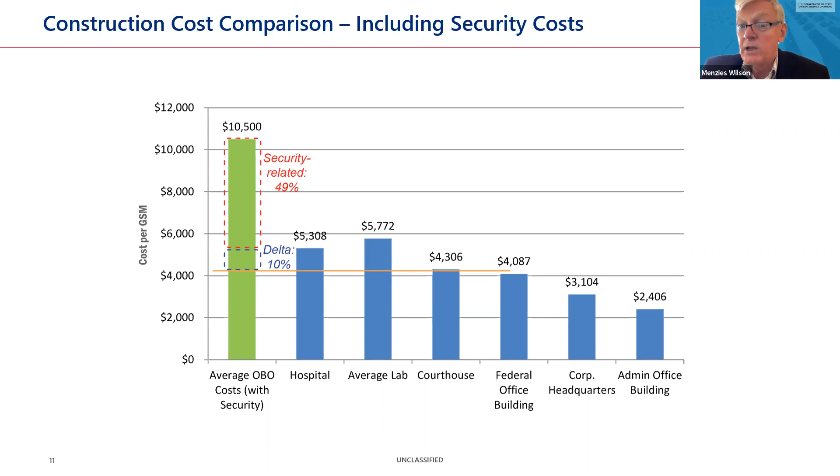If we go to the next slide, please - what it does for us is it makes it a little bit difficult for us when we compile our estimates to use commercial databases, because the construction cost data there is not that relevant to the work that we do. This has been a challenge for us over the last several years, and we are required to do fairly detailed estimates at early stages in the project.

As I mentioned before, we do parametric estimates from basic planning, programmatic information, all this kind of stuff. So how do we underpin those estimates, and what kind of cost data do we use? So what we've done, and this is a work in progress, but it's working quite well for us, is we established a couple of years ago our own in-house cost data group.

We hired a couple of data analysts and put a couple of cost managers on that to analyze all the data that we have in-house, synthesize that, and try to break that down into some common work breakdown structure that we can then feed back into the estimates that underpin our cost models and that exist within our cost estimating software. We currently use Sage Timberline with a couple of reporting functions added to that. It's working very well for us.

And from that, we've been able to develop 12 basic building types. These are sort of common buildings that we typically have on our embassy compounds or campuses overseas, whether it's the access pavilions, marine security guard quarters, warehouses, that type of thing. And we've developed models that we can then input basic programmatic information into that will give us a detailed cost estimating output.

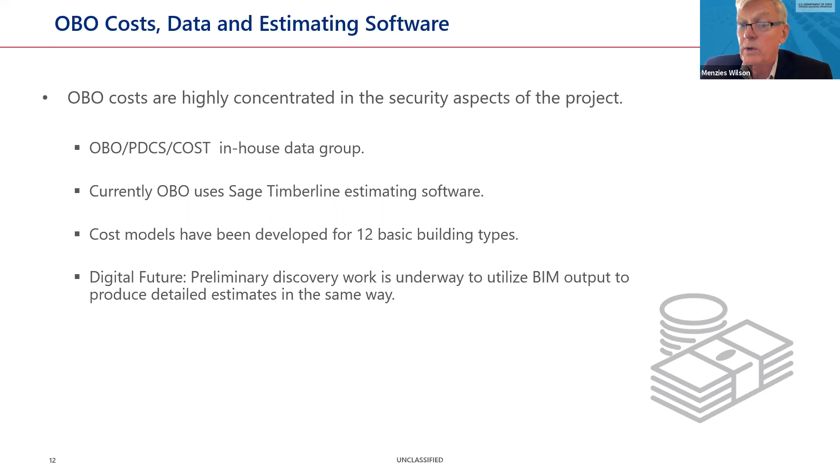We would then escalate that to the projected time when construction is estimated to start based on the program we have. We have some futuristic things where we're looking at a digital future, and right now we're using programmatic information from the Space Requirements Program. We believe we can get similar programmatic information directly from BIM, and we'll talk about that later in the program. There are some exciting opportunities up the road in terms of what we can do for cost estimating from BIM outputs.

Back to the data strategy we had, one of the problems we've had is data. We don't have good data. Individual cost managers will invent their own workarounds, and so there's a lack of consistency and uniformity across the estimates. This is something we want to try to eliminate.

We're working with our cost estimating consultant and our data group to try to integrate and absorb the data we've got and put it into a useful format. We get, for every single project, milestone estimates from the AEs that go down to Uniformat Level 4. These things line all over the office in 3-ring binders and PDF format, and we lose that data, so we want to try to capture it. We're putting in place a strategy and process to get to that so we can improve the quality of our estimates and be less dependent on expensive commercial databases, which really don't have a whole lot of utility for us.

Just a couple of other points I should have made before: all our projects use US architects, US specs, and US general contractors. All our contracts are denominated in US dollars, so that may give you some idea of the tremendous US component to our projects.

Back to Angel's comment about the embassy effect, we sometimes find that our facility, our embassy or consulate, becomes a kind of economic anchor in that locality and spurs economic growth, supporting restaurants, coffee shops, and all that kind of stuff. In addition, we estimate that about 20 to 33% of the total project cost is a direct investment into the host country, which is a fairly good diplomatic message for us to send. But also 60 to 70% of the value of our taxpayers' dollars actually comes back to the US, spent with consultants, architects, suppliers, contractors and others who support our projects. Just a point to bear in mind.

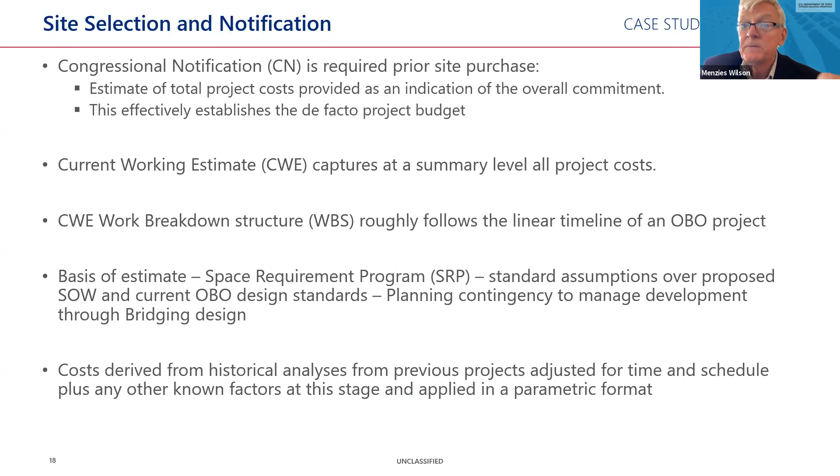This is the typical work breakdown structure of the CWE that we would send in support of a congressional notification that accompanies the project all the way through. It's pretty linear, and it roughly follows the logic of the delivery process. We do the site acquisition, project development, then we go into design.

Once design's complete, or bridging in this case, we award a design build contract. We may have other construction costs - telephones, utility connections - that are performed by others other than the primary contractor. We have a planning contingency, which we'd use to get us through project development. And then we have a construction contingency, which we hand off to our construction arm once it goes into project execution. We may have value added tax that we have to pay, and we also have project supervision, construction security.

We have to furnish the building. And then there's a small allowance for art in embassies that allows our cultural heritage group to go and acquire appropriate artwork to display in the finished facility. The bottom line, the total, is the total request for funds that we ask Congress to give us. Once that's approved, we go forward and move into the development of the concepts.

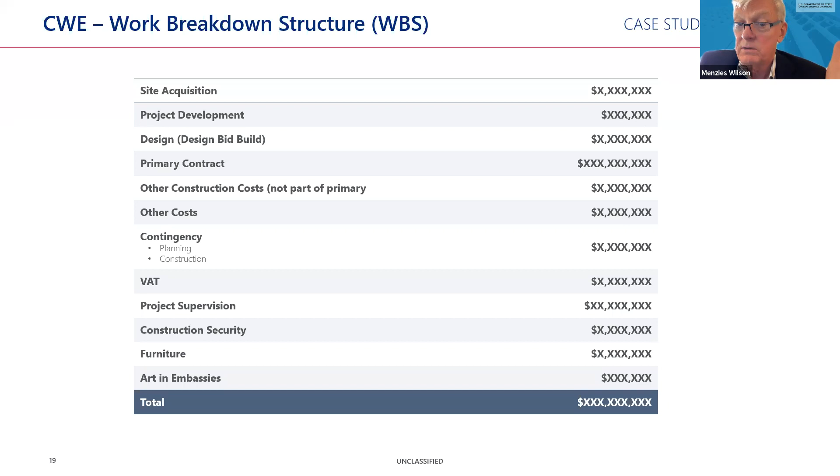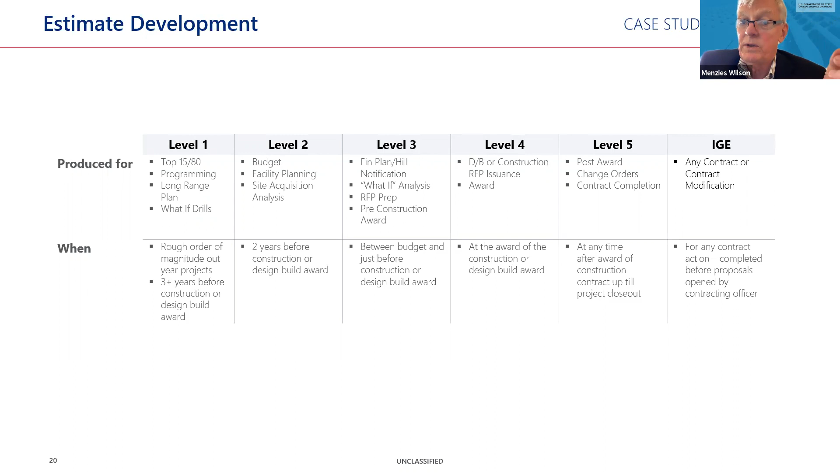Again, the CWE is categorized by different levels based on the certainty and quality of the information used to produce it. It starts off at the basic planning level from preliminary planning information, space requirements, and moves up right through to level 4, which is the complete bridging design or complete design if it were a design build or design bid build, pretty much at the time the contract's awarded.

Everything follows through, so we're tracking the costs all the way through the different CWEs, reconciling the differences. We get the check estimates in from the architectural team, and we're trying to keep the project on track all the way through, and we track and report on that to our management and beyond if necessary.

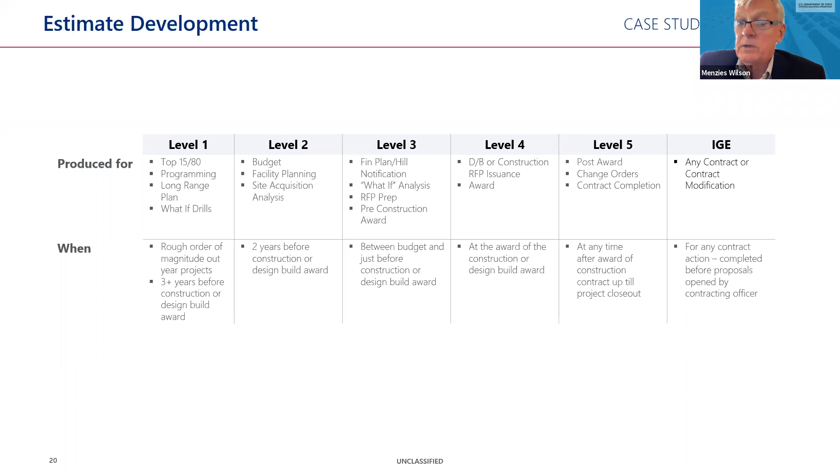So once we've got the site selected, we've notified Congress, we buy the site. The next thing, we move into technical due diligence. Our teams of design group and our OBO-led project management teams with the cost manager will go to site and perform what's called the project development survey. We're starting to look at how we're going to accommodate the program onto the site. We begin the technical due diligence - soils reports, utility connections, and all those other things.

We're also doing an early evaluation of the risks, both economic and political. They'll be looking at logistics, execution type impediments perhaps. Political risks in terms of, can we get visas in there? What's the state of the local workforce? What's the availability of materials? Is there enough space on the site to accommodate laydown and all that type of thing?

From all of these things, we start to formulate what we call the design to budget. We're going to get ready to go with the architect or the architectural team and develop 3 concepts, one of which we will pick, and we will give him a target cost that we want him to constrain the design to fit within. And so we're moving on now.

Back to you, Angel. Yep.

When we kick off designs, there's always overarching OBO goals, which we've talked about in the beginning - security, resilience, and stewardship. And then there's project-specific goals, really based upon what's happening in that particular location.

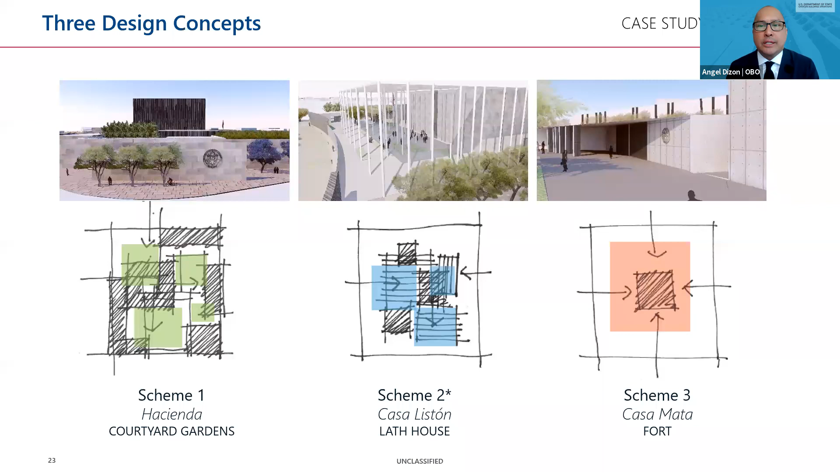And then obviously we start to settle in on one. In this particular case, we settled on scheme 2. It's described as this lath house, which is that sunscreen that provides shelter above.

This is kind of the point where the AE is starting to get into more detail - there's some more refinement on the major security mitigations, especially physical security, the major site moves. We're looking at the bigger infrastructure decisions and all the big things that impact the massing and the blocking and stacking, and that's what this second evolution is. We're also starting to look at facade a little bit more, diving deeper.

The other thing that happens in parallel to the industry advisory reviews is what's called the senior management review - all the office directors, managing directors, and the director of the bureau together in one meeting to better understand the project and provide advice and guidance on things they're seeing from their senior perspective. So at the same time there's a design review by the technical staff, and the senior leadership review just to make sure we're setting the right course for ourselves.

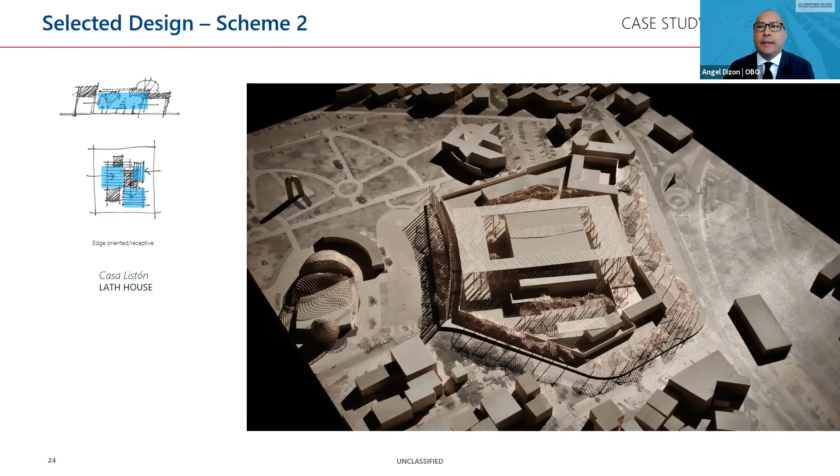Once they've selected the preferred concept, sometimes there are a few puts and takes, as Angel mentioned. The Industry Advisory Review Board may make suggestions to incorporate various pieces, perhaps from one concept into another, and come up with the final accepted design that they want to proceed with.

At that point, we may make some adjustments to the design to budget. These tend to be fairly minimal, but we're going to go forward with a design to budget issued to the architect who's developing the budgeting documents.

He's then required to submit milestone estimates as the design develops to confirm that he's still on budget. For this particular case, on Matamoros, the design to budget was set at $120.4 million. The construction contract ultimately awarded was for 116.3, the lowest of three bids that ranged from 116 to 145.

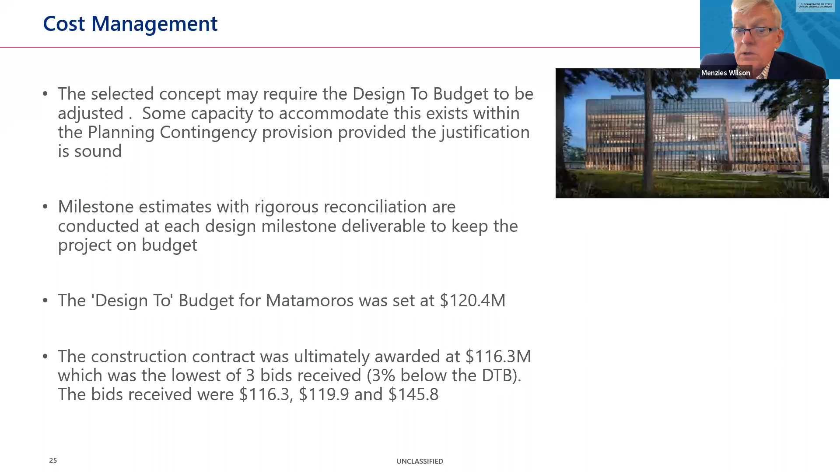So we were quite close, but at this point we haven't taken into account the contribution made by the value engineering study, and we'll get to that in the next slide. This project turned out quite well for us. If we go to the next slide, please.

OBO's got a pretty robust value engineering system. We've had that going since 1987. We've conducted something like 500 plus value engineering studies, and over that time frame we've booked $1.2 billion in cost avoidance or cost savings.

That averages out to about $35 million a year at a total cost to us of about $32 million. So the value engineering program is returning to us $37 for every dollar spent. So it's doing its job.

On the Matamoros project, we had 31 recommendations, 9 of which were accepted for a value of $2.1 million. If we apply that $2.1 million to the design to budget, that would suggest we should expect the bids to come in at 118.3, and the final award went for 116.3, with the second guy at 119. I don't know if we can take all the credit for that through value engineering, but we think it contributed something.

So we use that. It's mandated. We have a good program, and we're also trying to help other bureaus within the Department of State set up their own value engineering program. So we tend to be a leader within the department for that.

I know there are many of you out there in the audience who perhaps participated in these facilitated VE studies that we have. In 2016, we introduced a risk management program that runs similarly to the VE program.

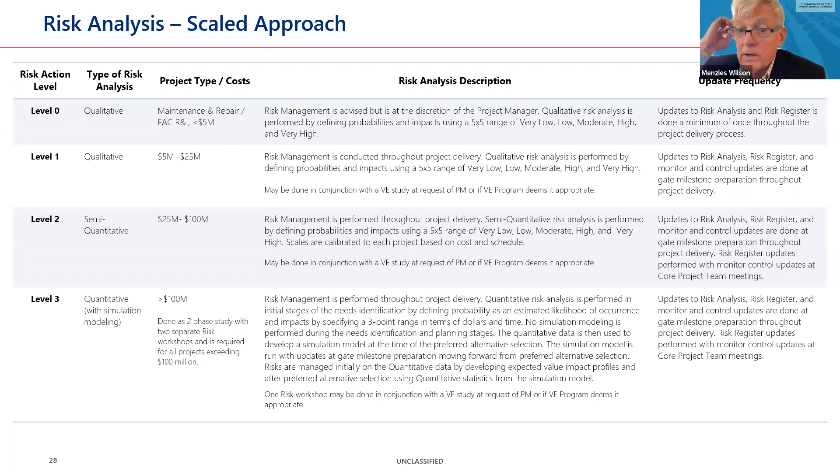So it's, I think I mentioned that, and then also the pilot program. That would require a combination of OBO core project team members facilitated and supported by AE and risk professionals who would come in on the team to help us understand and review the identified risks and look at the documents to see if there's anything else we might have missed.

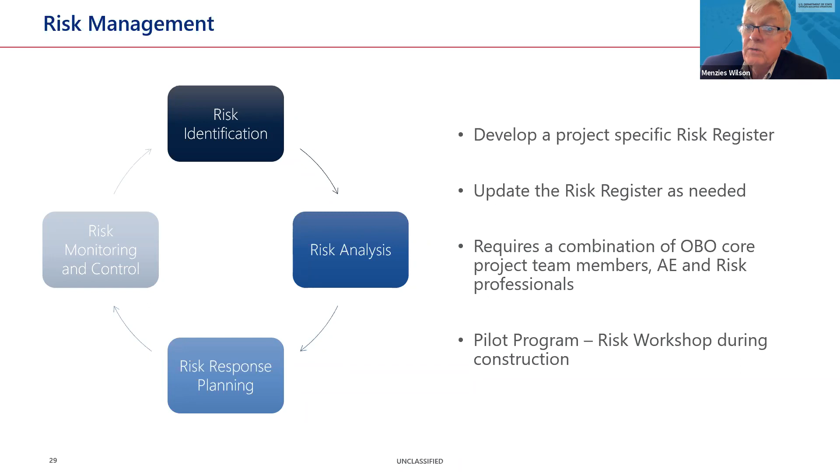Back to Angel. So obviously the process moves forward. We end up awarding, putting out the RFP and awarding the construction contract. And this is really kind of the result.

Some of the features here, one of the things I love about Matamoros is it's actually a relatively simple building. It's really just a box with this shade structure on it. But it's simple, not simplistic, right? It provides this performative type of quality in terms of keeping the sun off the building and reducing our energy demand by a pretty significant amount.

And it starts to add increased functionality for that exterior space that typically would go unused. Now, because it has shelter, it has become much more functional, especially when you're talking about consular visitors coming to visit, diplomats coming to visit. You're able to actually host events outside because of the structure. And this one gesture, this simple gesture of the awning, really becomes the performative, functional, and civic gesture for the consulate.

It's a wonderful little building, pretty modest price point considering having to build this in a different kind of country. But you can see here, it's a really kind of wonderful building.

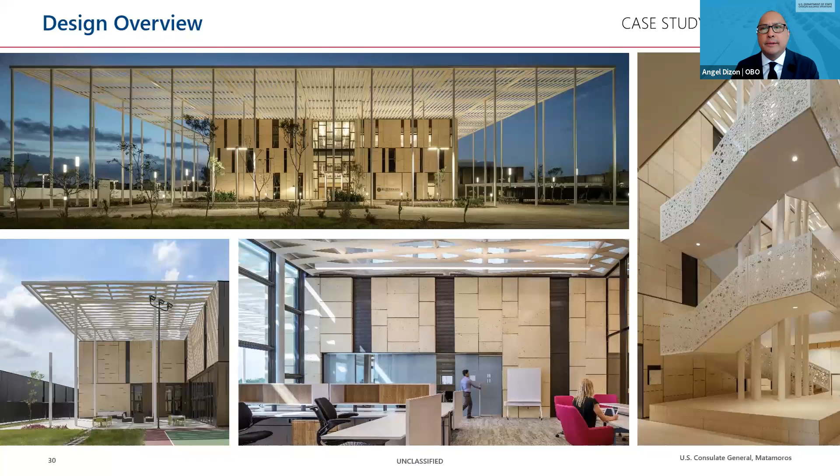Next slide. Part of what makes these things work is the way we really push the AEs to use materials and design elements consistently throughout the project so that we're getting a lot more bang for our buck. If we're going to pay for it, let's pay for it and get a little bit of mileage out of it. In this case, you'll see how the material and vocabulary around that canopy moves into the interior space and starts to define the ceilings for some of the office spaces and gallery spaces.

Same thing with the exterior limestone. This coral limestone is used on the outside, but also weaves its way into the inside of the building to give you this inside-outside kind of thing. But it also provides double duty for us in that, from a maintenance perspective, this building is pretty crazy robust, and the maintenance demands of these buildings are really low. When we're looking at 80% of the cost being after ribbon cutting, we need to ensure that these buildings are very, very durable.

And the more materials you drop onto a project, the more you're going to have to store somewhere to make sure that you're able to replace it. And so this architect was able to leverage the right kinds of materials, use them in multiple locations, and get a lot of mileage out of it.

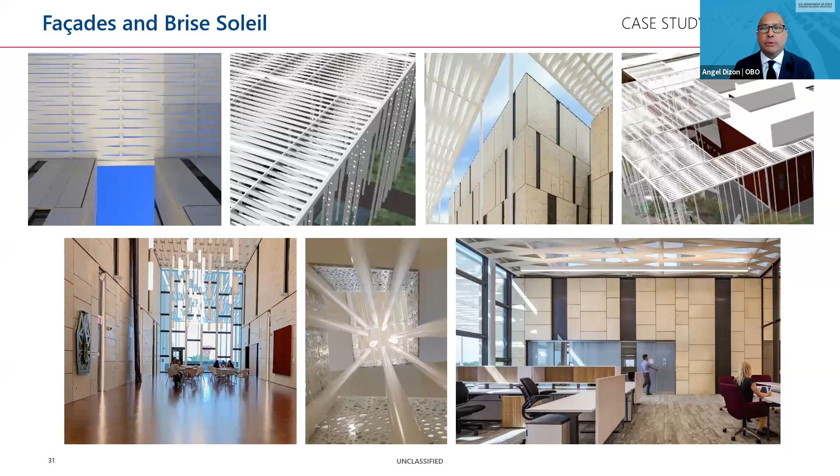The other thing this project does well is really start creating multifunctional spaces. Frankly, we don't know what this building is going to need in the next 10, 15, 20, 50 years. So it needs to be able to adapt within this fixed envelope and expand and contract within the perimeter of the building. So what the architect has done, and what we really request for all of our architects, is that we provide spaces that are multifunctional.

In this particular case, in the gallery, day to day this probably functions more like a social gathering space, a place to eat. The servery is just off to the right there in the back, but it's really kind of a social hub for the building. But it doubles for event space. It can be a place where we can host a town hall because of the scale. We need those kinds of spaces because we don't know exactly the future of these posts. So they need to be future-proofed in a way. And that's really done by providing multifunctional, multi-use kinds of spaces and materials.

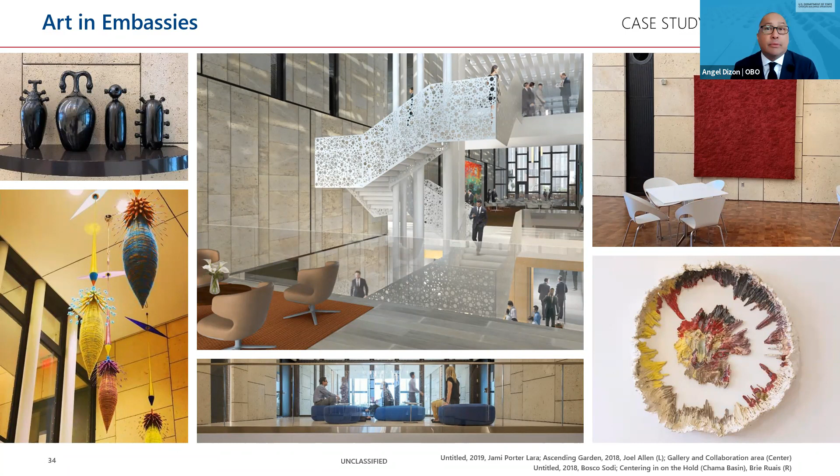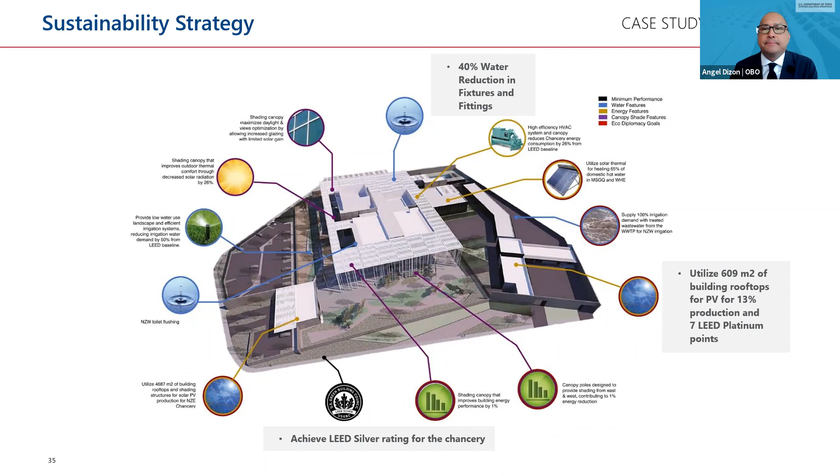So this is really just a summary slide of what we talked about. Those cities, those sites, they start to drive a lot of design. You have the program and the site, and they come together. It's really about adapting to that particular environment and the demands it has, and managing the precious resources in that country. When we focus on performance and functionality of our embassies and consulates, what's born out of that is the aesthetics.

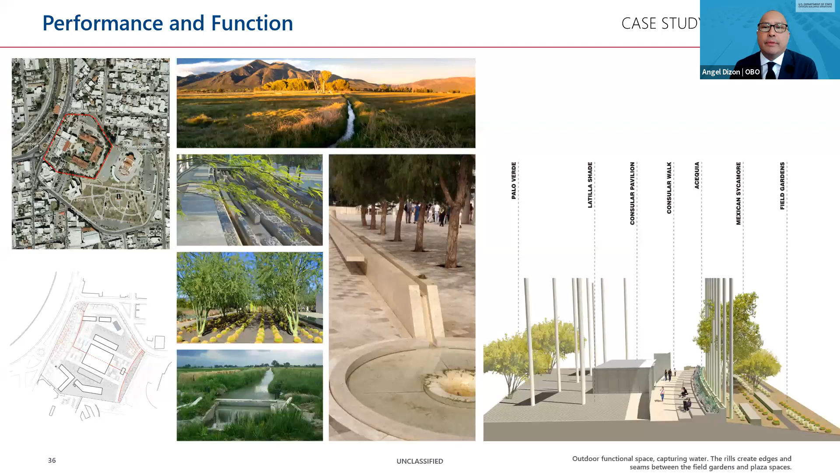And that's really true for Matamoros. The goal was to satisfy and minimize all that heat gain. But from that, we really got this civic gesture, and it really is the aesthetic value of the concept.

Next. So like all construction, we have challenges. Ours are very similar to theirs. A couple of unique ones: when we're working with these different host governments, they have different processes, approaches, and labor hours. It just varies. We're typically working 60 hours in the field, and in some places they don't allow you to work more than 40. That's a big problem for us, along with the permitting process or whatever. Those become challenges. In these different countries, currency fluctuations are a concern, and productivity is always going to be an issue.

One of the things that we do is hire an American to do the work, especially the classified work. We may use local labor—we actually use a lot of local labor—but we use them with American supervision, to ensure that they're doing the work the right way.

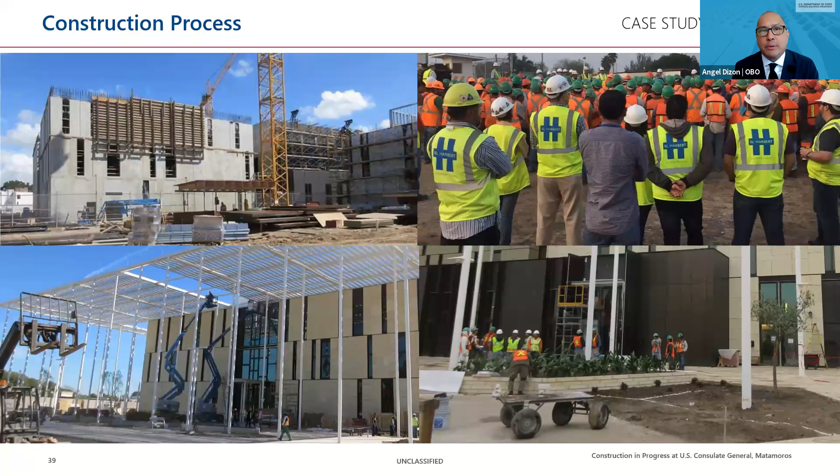I think where we've seen success, especially in Matamoros, has been our ability to work together. It is a partnership—no one's in this thing by themselves. It really is how all of us work together: OBO, the consultant, the construction contractor, and also Post. Post has a big say in all these things. The ability for all of those people to work together effectively is key to the success of the project.

And that's actually one of the things that has made Matamoros one of our really successful projects, is that we had a great team at headquarters, great team in the field, and a great team at Post.

And our success has been recognized in a variety of different ways. We got ENR Global Best Projects, we got an AIA Phoenix Metro Award, that's where Richard and Kennedy are, and it was nominated for an AIA Design Award. So what's nice is that the work we are all doing for this program is being recognized, and it's being recognized by the best associations in the country. So it's nice to know that what we're doing is right.

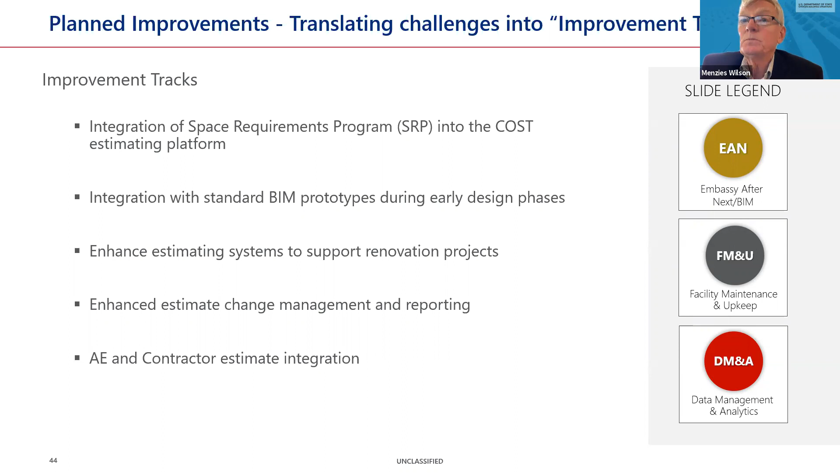This is just back to the renovation thing. What we're looking at is perhaps a work breakdown structure that aligns with these projects. We don't know whether parametric, depending on the intensity of the work, may be one way to go. Perhaps if we break it down into work packages, it might be more accurate.

And again, with data of what these things actually cost — it's difficult for us to do these estimates at the early planning stage before the scope of work's really been developed. Even then, there's a lot of issues with productivity and risk that contractors price into that. As I mentioned, we get huge disparities in the proposals, and possibly one or maybe only two bids on some of these projects, so that's a challenge. We're looking to find a better way to manage those projects.

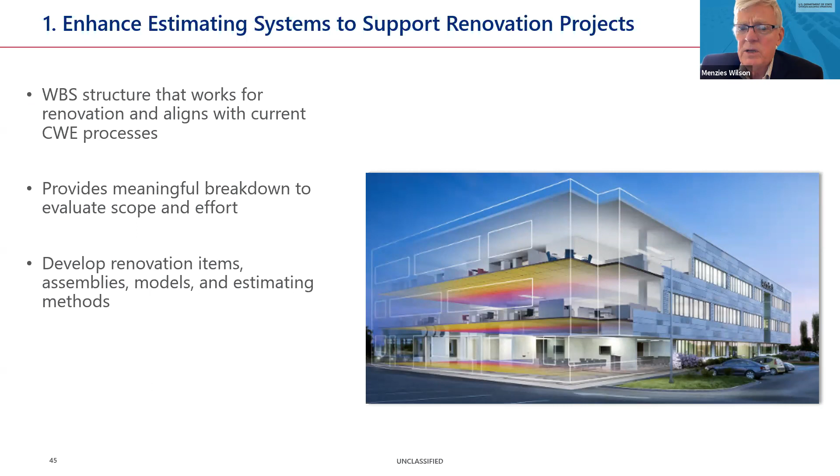I mentioned change management. We have some reporting software applications now that are helping us with that. In fact, I had occasion to use two of these this morning, and it seems to be working quite well. That's an internal thing mostly — we don't really need to involve outside people with that.

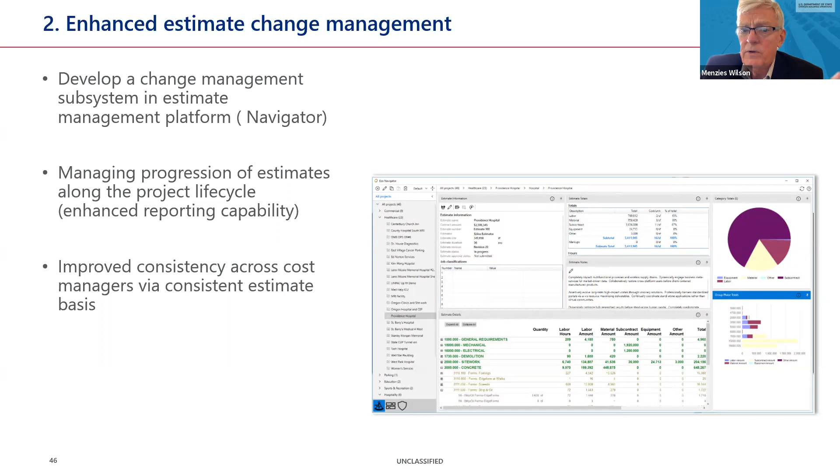This is the thing we've been working on for a couple of years — to try and get the AE and the contractor estimates to integrate with a common work breakdown structure, and to give us estimates in a soft electronic file that we would then take ownership of. It allows us to do the reconciliation process a lot quicker. It also allows us to collect the valuable cost information that's currently buried in 3-ring binders of PDFs, which we just don't get a chance to harvest and save. This would allow us to do that — reconcile these estimates, compare them to other estimates, and develop our database with our own in-house data group. Those costs, however we decide to analyse them, would then go back into the estimates that underpin the cost models for the basic building types we described earlier.

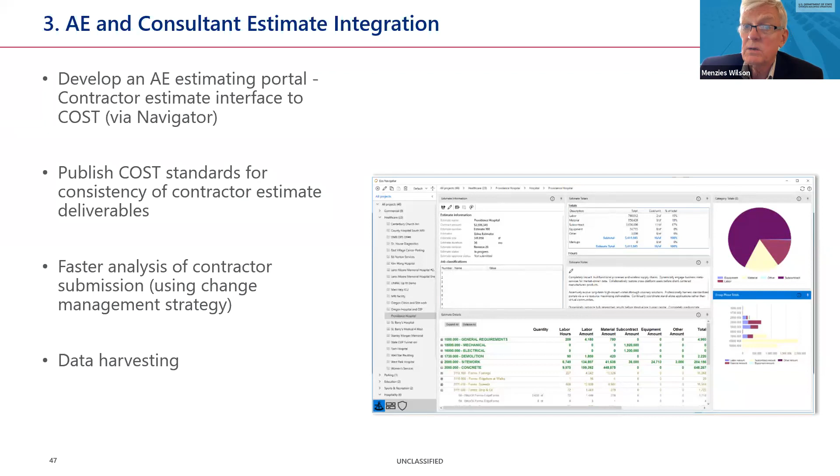So we're making some progress with that, and we're keen to develop it more. It would allow us to produce accurate estimates more reliably, quicker, and perhaps even with staff who are not as experienced as some of the others, which is a big plus for us. I think that's it for me.

So what we talked about in the beginning, we're going to close with - there's only a handful of slides left - is really about the sort of embassy effect. Beyond providing the platform, there are these kinds of effects because we've built that building.

The first one is really about the economic effect, and it is the thing that Megan sort of talked about. 25 to 35% of our construction costs are directly put into that local city, and that's a significant amount of money, and it changes a lot of things. We're investing in these cities in pretty significant kinds of ways.

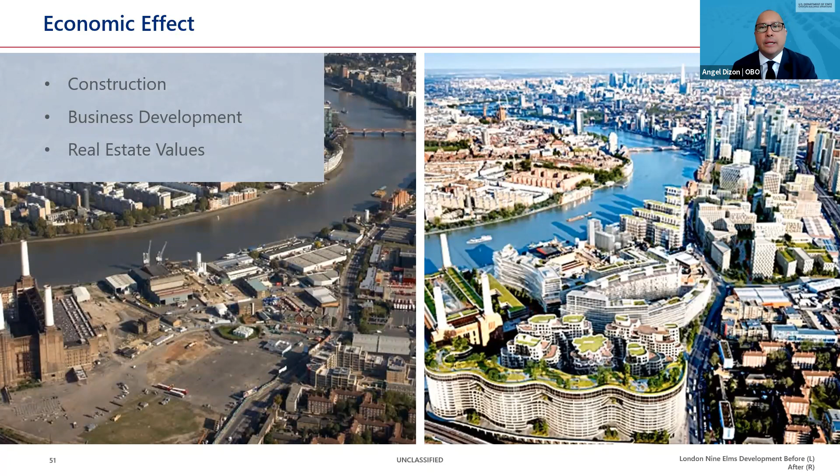We need to be good neighbors, but we also can put ourselves in a situation where we're independent of that host government and not reliant on them for energy and water, if that's something we can manage ourselves.

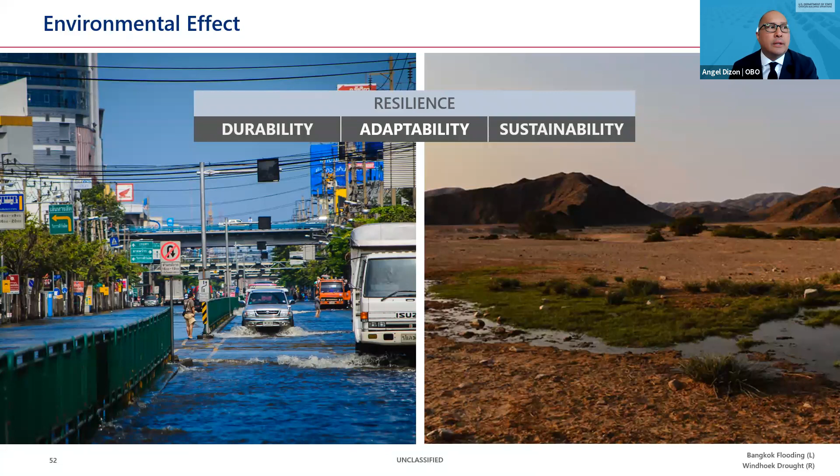And then the social effect, which I think is the most important one, is really about the kinds of things that we change with the people that are coming to engage in our facilities. A lot of the places that we work, we're making sure that we're not taxing the stormwater systems. We're providing electrical substations for us, but the city or the neighborhood benefits. We do roads, we do those kinds of things. So there's already these kinds of infrastructure benefits just for us being there.

In addition to that, we actually provide a whole variety of public amenities. In some cases, like in Milan, we renovated this historic building so that the citizens of Milan could use it. In London, we have this public park. In Rio, we have this sort of public promenade. Those are public gestures that the American government is providing that city because we're a part of it.

And then there's this whole host of cultural technical exchange - we talked about the art, we talked about the architecture - we actually do a lot of training. We're training people how to not only build these things, but also how to maintain them, and in a lot of different places, that's a skill that's not there. Imagine you could be teaching someone a very valuable construction skill and change the trajectory of their family because you provide them that particular skill.

Actually, one of our contractors has this wonderful story where they hired this person to work construction with them on a particular project. That person has now been all around the world for the last 20 years doing embassy construction work for them that they would never have had the opportunity to do if we didn't have this kind of program.

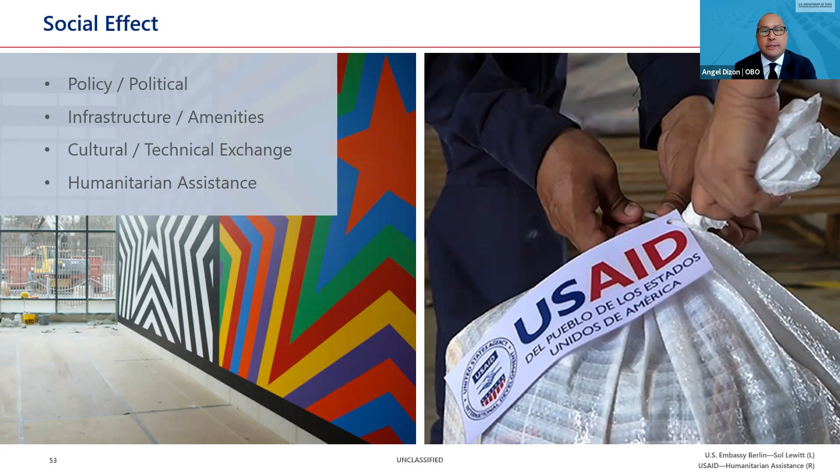Next. So we've done a lot to make sure you know how to get in touch with us and engage with us. There's a whole host of social media, different kinds of websites and email addresses you can reach.